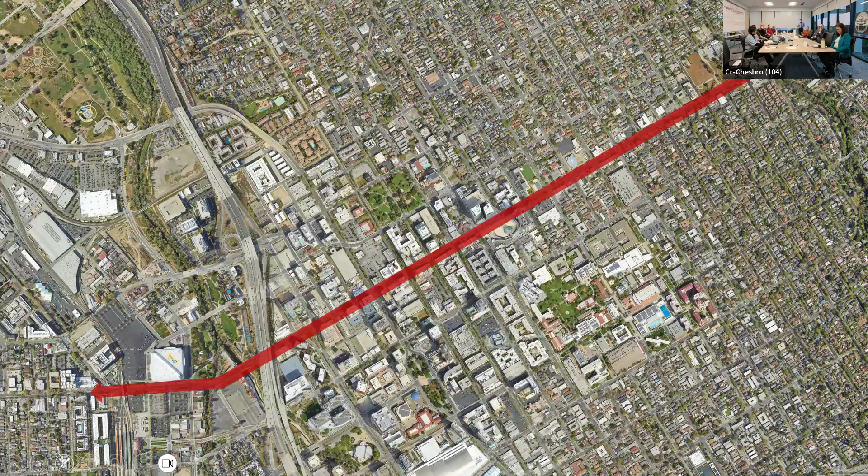So when looking at this corridor, in conjunction with our work on the downtown transportation plan, we wanted to not just look at the specific street itself, but really think how it interacts with the larger downtown and integrates with the urban fabric downtown.

This effort is looking at this stretch of Santa Clara Street, as well as thinking about those blocks to the north-south. How do those interact with the street? Are there uses happening on the street today that could make more sense to move onto those side streets? Thinking about parking, for instance—in some places restaurants might want outdoor dining, so can we move some of that parking and loading to the side streets, just as an example?

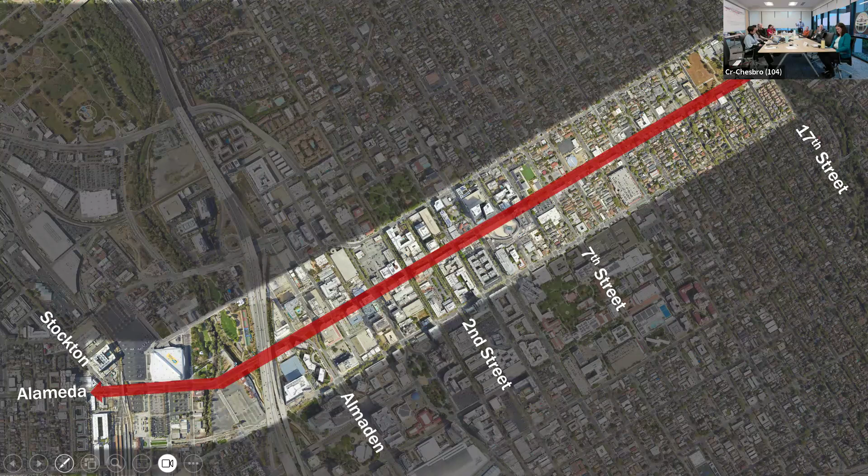For context, we have Stockton to 17th. We have 7th Street here in the center, which leads us to San Jose State and City Hall. 2nd Street in the middle, right around our light rail core, Almaden, Big Heavy Street, and the SAP Center and Diridon on the left.

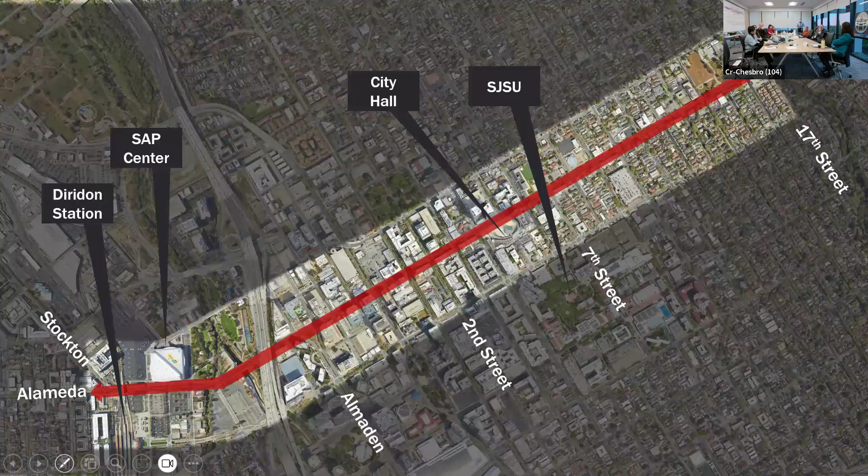In thinking about this, we realized this needed to be more than just a transportation project. We needed to think about what the street is doing. Since the street is really our largest public space in the city of San Jose, how can we maximize the utility of that public space for people in San Jose, for businesses, residents, and visitors—thinking of it as something more than just a way to get through downtown San Jose, but a reason to come to downtown San Jose.

Through an RFP process, we met with a large number of firms and had a lot of really good discussions, but we ended up deciding to go with SiteLab. They're located in San Francisco, so they're very familiar with the Bay Area context in San Jose as well.

I think they really got our idea around a very multidisciplinary approach—not just focusing on street signals or potential changes to pavement, but how do we activate this space and make it into a public square for San Jose.

For folks on the call and in the room, you may have seen this name before. SiteLab has done great work on 28th Street Station and some other work for Downtown West as well. They're very familiar with this corridor, and we think they're a great fit for the city moving forward.

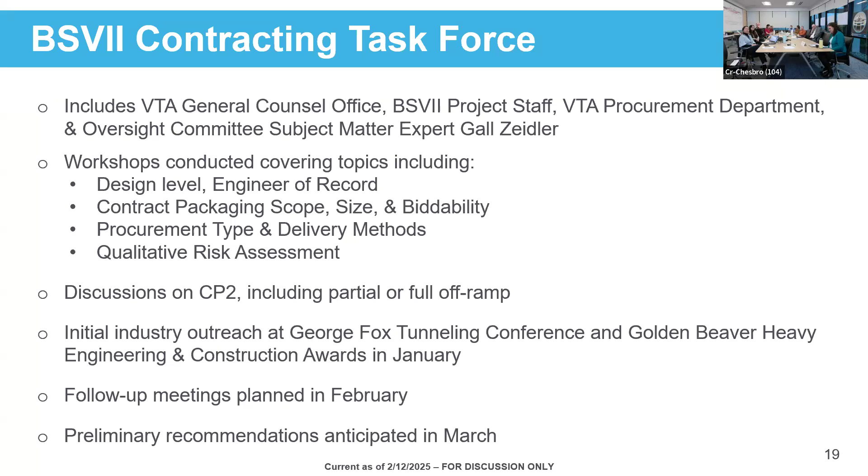That is within the NEPA guardrails, so it does not require any additional environmental clearance. That was confirmed at the workshop we had in December.

In addition, the West Portal launch structure construction was awarded at the December board meeting and is getting ready to gear up, which means the large shaft where the tunnel will start from will begin construction. That will also kick off extended work hours and weekend work.

The area in dashed green at the bottom shows our FTA milestones. Our federal lobbyists came and gave an update at the VTA board meeting last Thursday.

Based on their guidance, since they're closely tied into what's happening in Washington, we're evaluating the time frame for submittal of our FFGA, the full funding grant agreement documents. That section may shift over to the right, and we're working through and evaluating that now.

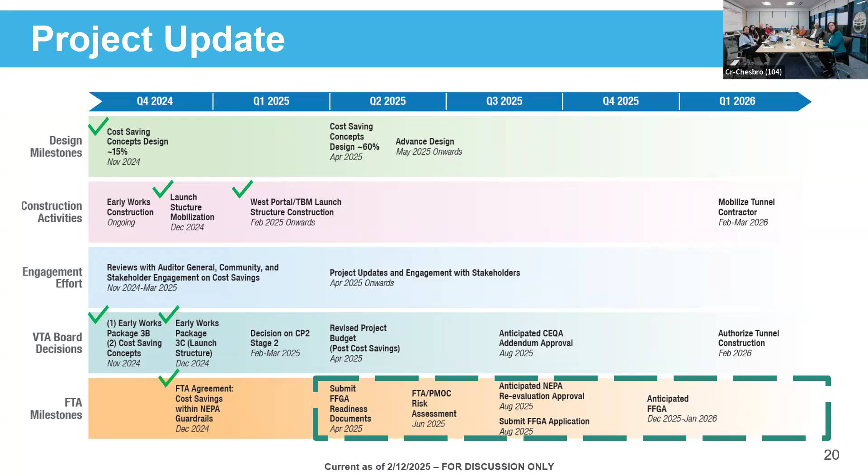Any questions on that before I get into the cost savings?

We haven't hired a consultant or subcontractor that hasn't gone over budget. It just happens. You were saying how these several tunneling companies see if they can work within our budget. What kind of contingencies do we have, because they always lowball, and then three-quarters of the way through, it's 'we can't make it without more money.' And of course they're three-quarters of the way through. What are you going to do?

There is contingency built into our budget, and risks that are also contemplated as costs within our budget to account for that.

Diving into the cost savings, you've all seen this table before. The top four items are the Level 1 items we've discussed previously: changes to criteria requirements, refinements to stations that don't affect the passenger experience, converting the parking garage at the 28th Street station into surface parking, and using owner-provided materials.

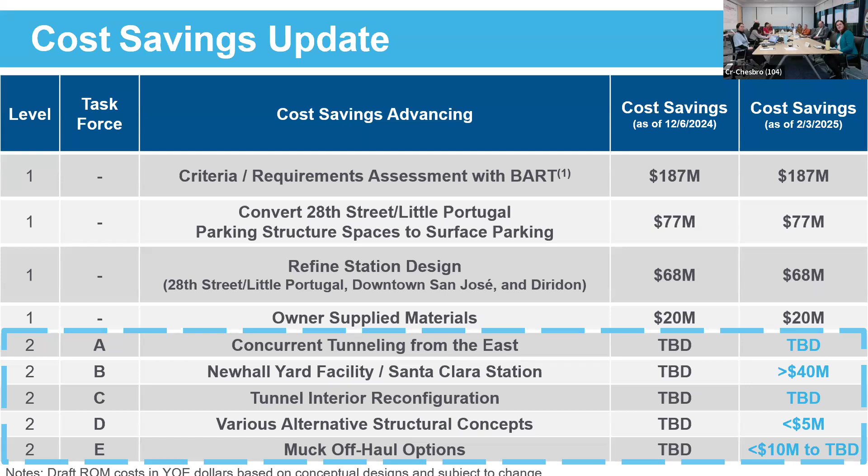For those cost savings, we've advanced enough to have rough order of magnitude cost estimates. There were some areas that needed further study, which are now considered Level 2, so we've pulled together task forces for each of those groups. I'll walk through the status of those five groups on the next coming slides.

As I walk through them, similar to Level 1, there's a criteria evaluation here: what the cost savings is, whether it will require additional federal or state environmental analysis, whether there would be a change to forecasted ridership, whether additional right-of-way would be needed, whether coordination and engagement with BART and other third parties is needed, and whether there's a need to coordinate closely with the community.

The first is Task Force A, concurrent tunneling from the east. This task force focused on a smaller single bore tunnel based on space proofing. It was determined that a 45-foot diameter smaller tunnel boring machine could be launched from the east portal, while we would still have the 53-foot diameter tunnel boring machine launched from the west portal, evaluating whether they meet up at 13th Street or somewhere around that location.

Through this study, with the change to a smaller tunnel boring machine, we were able to make the depth of the alignment at the stations a little bit shallower. With the smaller tunnel, this station would require cut and cover construction, with platforms on the sides of 28th Street. There would be no changes to the passenger experience at the surface level, but below ground, instead of a center boarding platform, there would be side boarding platforms. There would be some increased truck traffic due to this, as well as some additional environmentally cleared right-of-way that we didn't think was needed that would now need to be acquired.

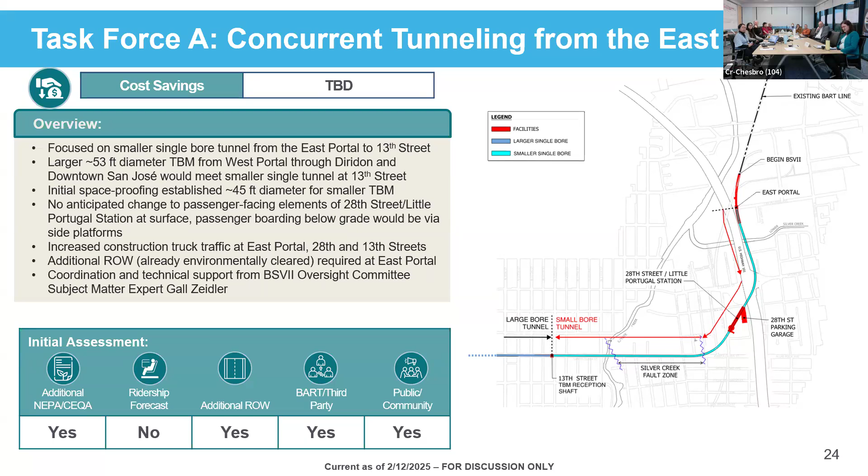In this task force, we're coordinating with Gall Zeidler, our subject matter expert, evaluating whether this is something that could move forward. Right now we're looking at the cost savings and schedule savings from doing the concurrent tunneling. A decision has not yet been made, but I wanted to show this next slide so you can see it a little bit better.

That's just because tunneling is incredibly expensive. That's where the savings comes, as opposed to cut and cover.

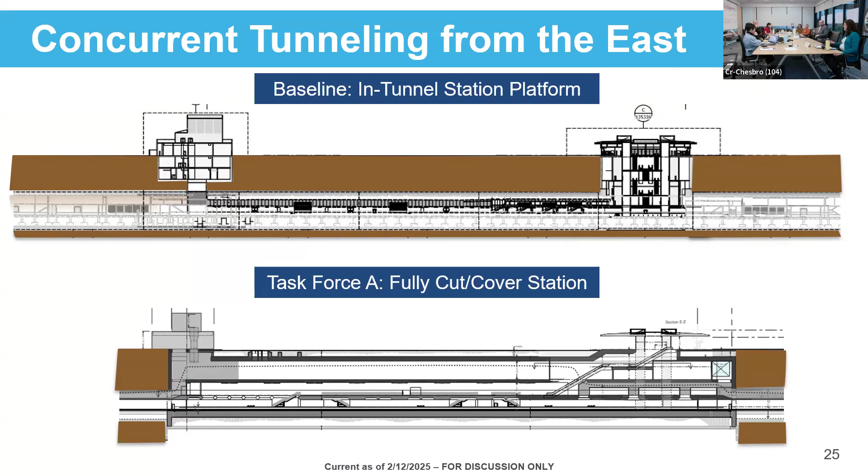It is, right? So if you have 2 tunnel boring machines, initially there would be some upfront cost from having to buy a second tunnel boring machine, but depending on what the schedule savings would be, schedule savings is time savings, which also converts to cost savings. So that's what's being evaluated. Does that answer your question?

All right, the next task force B is looking at the yard and the Santa Clara station. We talked about this as early as level 1, but it needed further refinements, so it moved into level 2. We coordinated closely with BART and landed on this layout, which provides more efficient vehicle storage and maximizes the efficiency of the maintenance areas.

We're looking at evaluating the trade-offs between the capital costs and operations and maintenance costs. This layout we came up with BART provides around $40 million in savings, but still includes the parking garage at the north end there.

So we wanted to continue looking with BART and address some of their comments and see if we could find additional savings. As you can see here, this is option E. So we've gone through several iterations already.

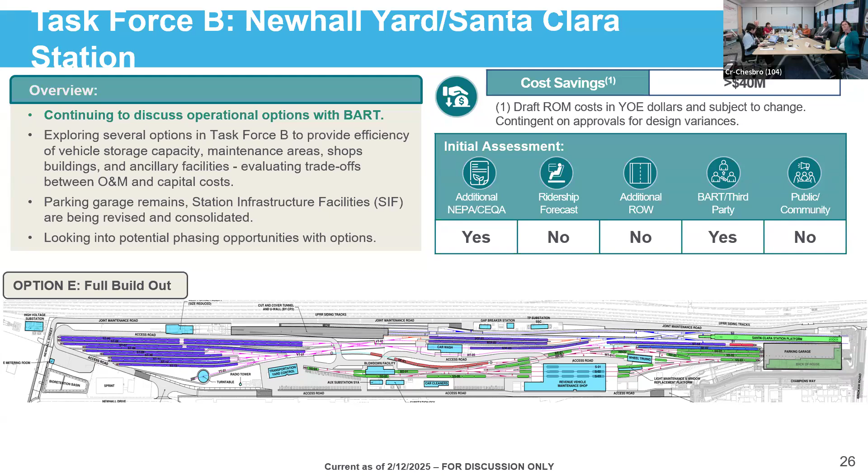We then looked at option F, where we were able to remove the parking garage and include surface parking. That is something we worked through with BART, and as you can see, that provides much more cost savings, over 100 million in cost savings.

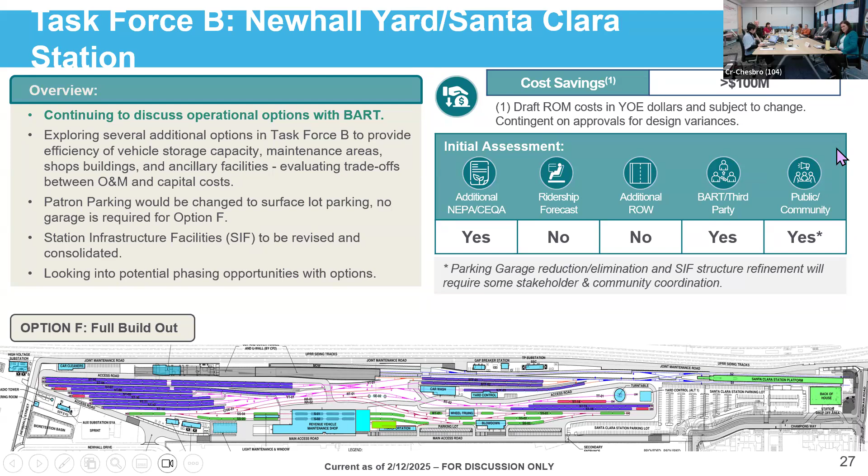Still, there were some comments, and so we're now on to option H. That's shown as draft, very hot off the press, keeping y'all updated. We haven't worked through this entirely with BART yet, but it's in progress, and that's why the cost savings is TBD as well. As we learn more, we will report back.

And for all of these options, we're looking at potential phasing opportunities in conversations with BART related to that.

Knowing that the most public facing piece of all of this is the parking garage, I wanted to show a zoom in here of the parking garage layout on top that we currently have, and a potential draft layout of surface parking on the bottom. If we move forward with these options, we'll have more engagement on moving forward - just wanted to give you a better glimpse of that on the screen.

I see. So you're just leaving the space, paving it for parking, with the idea that sometime in the future, after operations get going, you will then, as money comes available, change it into a more quote-unquote full-blown maintenance yard.

Well, this area - this effort is to space proof, to see what can fit in there. Initially the phasing we were talking about was potentially just some sort of storage tracks or very minimal things, and then get to this full build out that we're showing on the screen.

So the area for parking would remain, but if we have parking that's not over a garage, then there's potential there could be some sort of development over there.

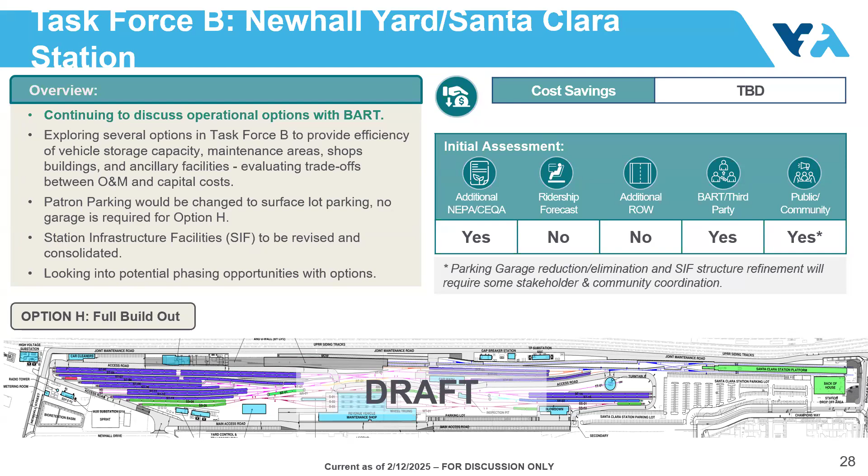Jonathan, I see you have your hand up. Do you have a question about this? Yeah, are there any additional details, or were there any other changes or refinements to the station itself, or is this just reconfiguring the yard part?

Just reconfiguring the yard part and the station infrastructure facilities. If you look on this one, you can see a little bit. So there's no changes to the station. If the parking garage goes away, then the station infrastructure facilities that were fronting Champions Way on the ground floor will be transitioned into what you can see as kind of a rectangular box shown there for those facilities moving forward. So we'll have a lot more engagement and discussion if this moves forward, but this wanted to keep you updated on what's being explored - no changes to the station or the platform.

So do we have any updates or pictures of what the station itself looks like at this point? I know all the refinements are being looked at. Is this all the way back to the last thing that came out of the DRC, or will we be seeing an update on what this all looks like at some point?

So the station has not changed at all from the last images that you saw. Which set? I know there were some refinements, but I don't know if anything got solidified. I know there was the DRC and then some shrinking of things. I'm not clear what the leading candidate is at this point, so it might help to get some clarity about that.

Yes, so we had the design review committee meetings, and then we reduced the size of the station entrance building slightly and made some modifications, and brought that back to the group here and discussed with you. That's the latest that we have. The stations have kind of gone on hold since that point, and we've been exploring these other task force areas. So the only thing modified related to the station thus far is the parking lot in that back of house building, but this is very high level concept at this point. We would have future additional engagement, but not anticipating it in the imminent future.

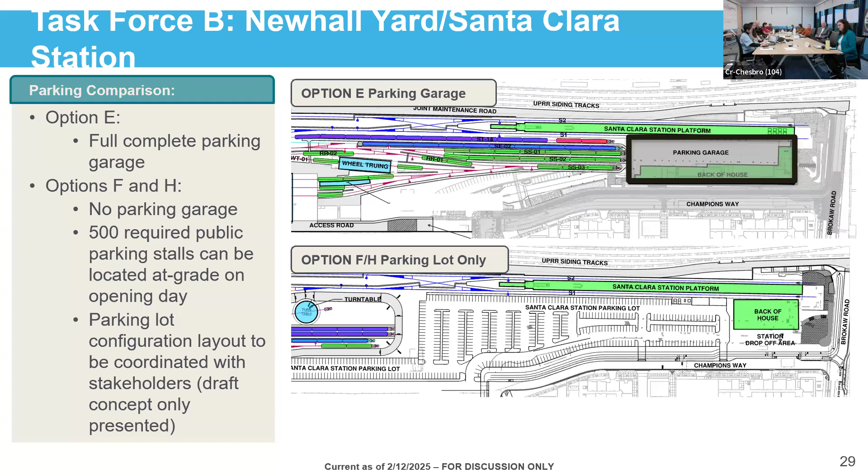Task Force C is looking at the interior of the tunnel, looking at the bottom, having structural fill on the bottom with the emergency ventilation in an overhead plenum on the top above. This is being evaluated. It's technically feasible. We're working through comments and questions with BART and reviewing the schedule to see if we'll come up with savings. We'll have more information on cost savings in the future. This is the current status of this task force.

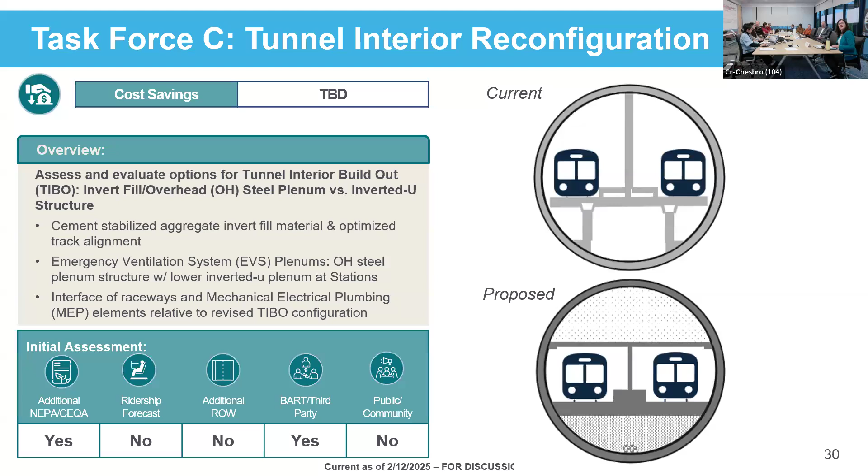Task Force D is looking at various alternative structural concepts, changing and optimizing the support of excavation rebar within temporary and permanent walls, and different structural elements. This resulted in savings of a little less than 5 million. This was something we had started in level 1 but weren't able to wrap up entirely, and now we've been able to advance that further.

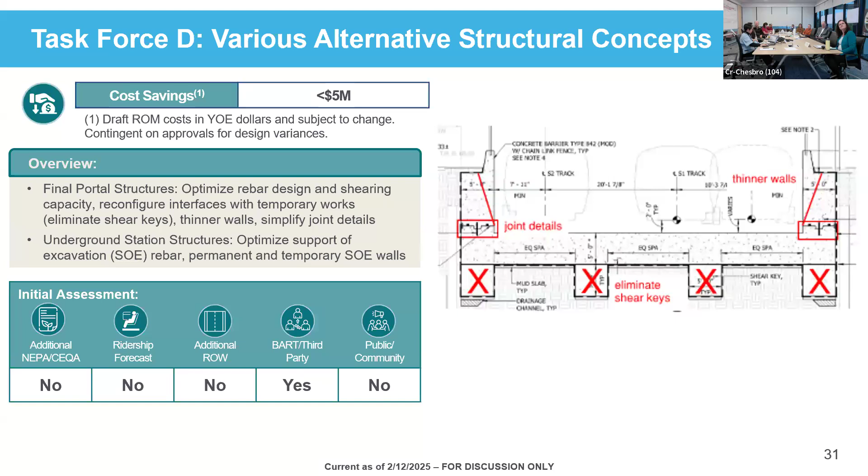The last task force, E, is for the muck off-haul. This includes hauling to local disposal sites to reduce trucking costs. With this change, we're able to save a little under $10 million. In our original estimate, we assumed we would have to truck to places near and far for disposal, but based on more research, we've determined there are enough close local places that we don't have to take those longer trips.

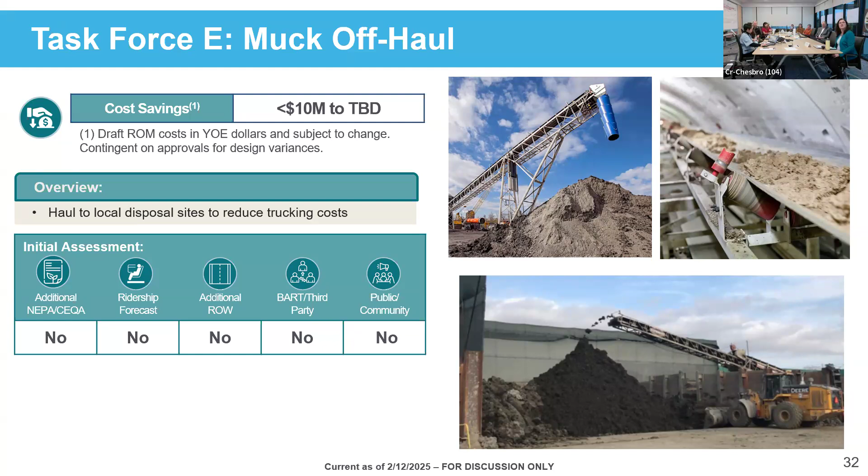We've also talked recently about the salt ponds project and various other options, and those will be studied as part of the next level. This report here is just on the disposal sites, and that's all I have for cost savings. Any other questions before I turn it over to Brent?

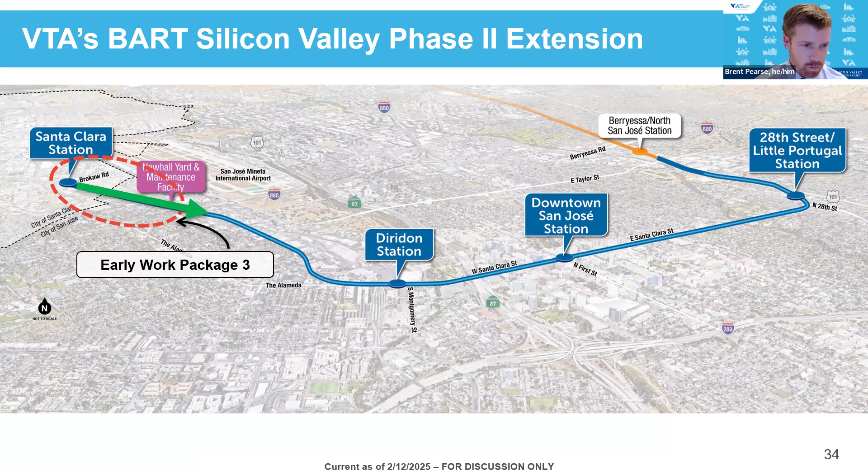Just to reorient everyone, you've seen this slide a couple of times, but our contractor has been doing some of the early works out there, mainly utilities, fencing, some drainage and site preparation. The colored squares, the purple and the pink or brown, are things that will come later, supporting the tunnel, either the tunnel factory, the place where we'll store muck, or the concrete factory. I'll call out some of those locations when we do the drone flyover.

What's most important is what's upcoming, the item in the top left at the southern end of the yard. That is where we have just given our notice to proceed to our contractor to start work on the launch structure for the tunnel boring machine. This is a large excavation, a large pit where we'll put the boring machine into, and it includes a ramp. It's about two years worth of work to build this structure, and it's going to be kicking off in May.

With that come two other important things for communities around the station. Before we go on, we'll be beginning some night work activities starting in May, and also some shifts starting on Sundays as well. I'll talk a little bit more later about how we're going to be notifying and bringing you all up to speed, but just so you have a picture of what's going on out here, this is where most of the activity is going to be starting up this spring.

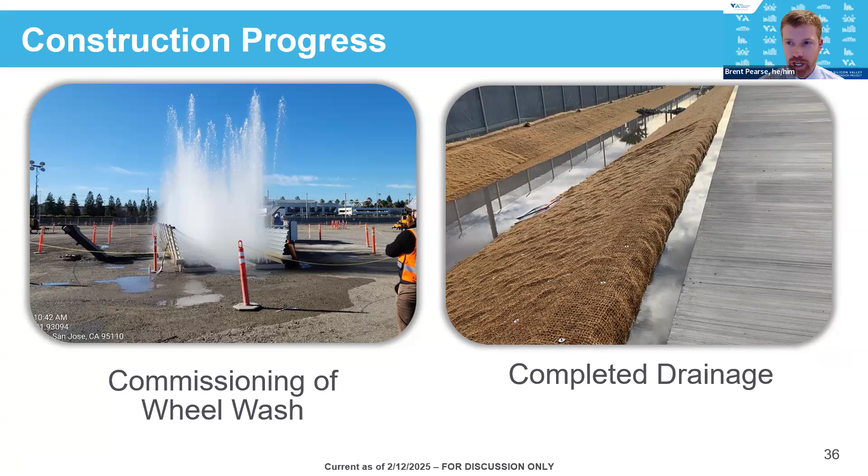All right, so we're going to do a flyover here, but before we do, I just want to orient you. You're looking south right now. You can see the downtown San Jose skyline there in the distance. On the left we have Coleman High Line, and on the right we have Caltrain and the Santa Clara Historic Depot. So we're right above Brokaw right now, looking south down one of the new roads that's been constructed. So let's hit play.

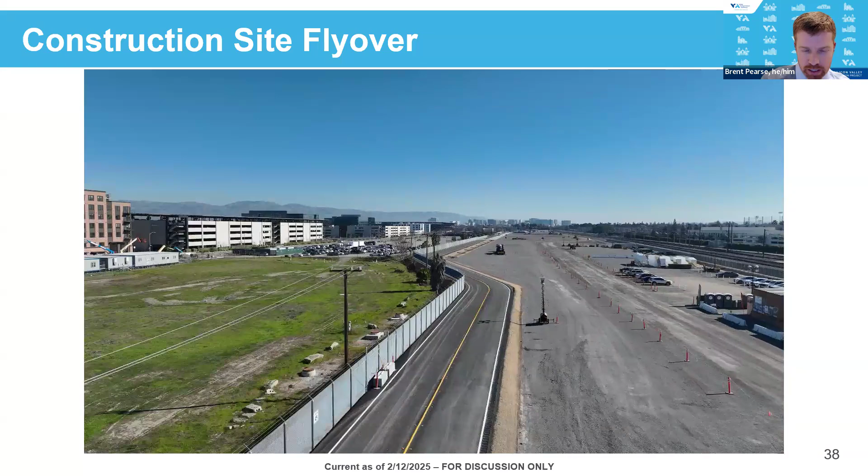So you can see new drainage there on the right and on the left, right next to the road. This is where we have one pod of offices for our contractor. They're going to be bringing in some additional trailers for staff as the contractor ramps up for the launch structure construction. Kind of in the middle of the site here on the right is where some of those facilities are going to eventually be constructed for the tunnel lining factory, processing the concrete, and storing the muck as it comes out of the TBM shaft.

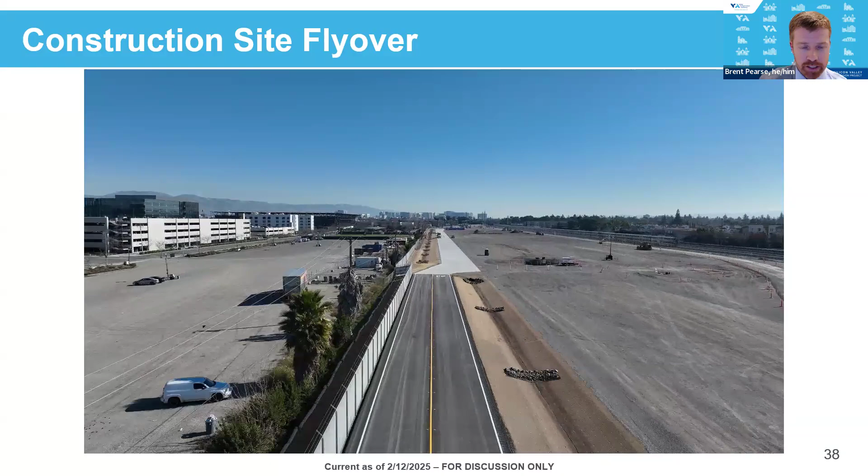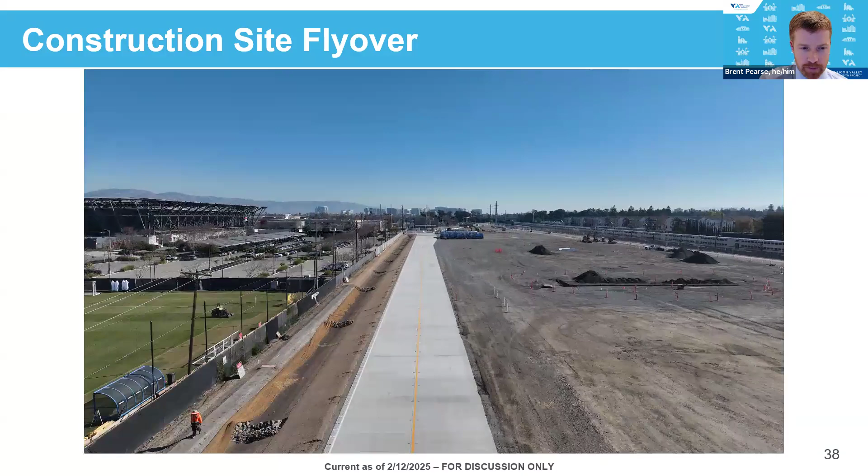So here's that new drainage ditch that we were sharing with you. We've been monitoring this very closely. It's been working well with the recent stormwater events that we've been having on site. Also been working on some fencing with our partners, getting that fencing up.

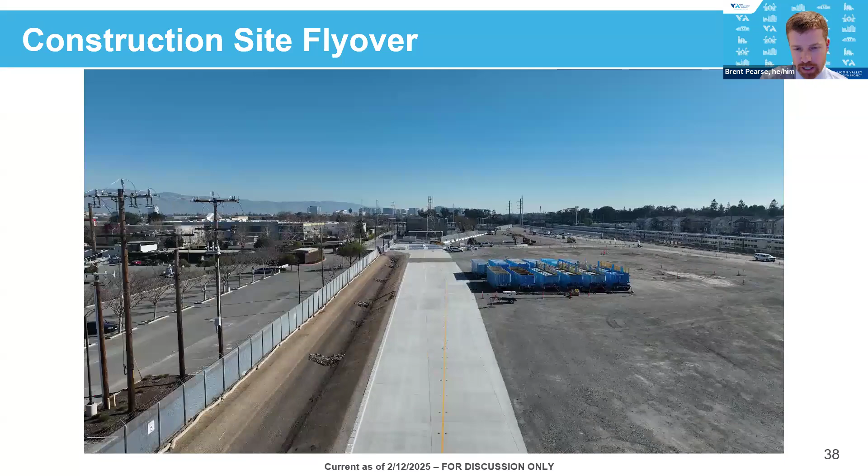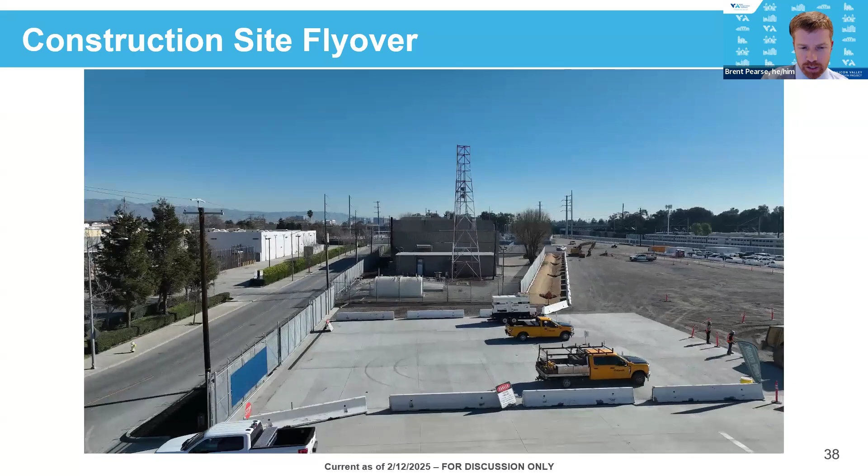And you can see here some of our filter tanks. This helps filter sediment off the site, or that's discharged. And this is the entrance that has been upgraded as well, so this is our entrance to Newhall Yard. We've been doing some utility connections here with the city as well, water, drainage, and there'll be some PG&E work further south on the site as well.

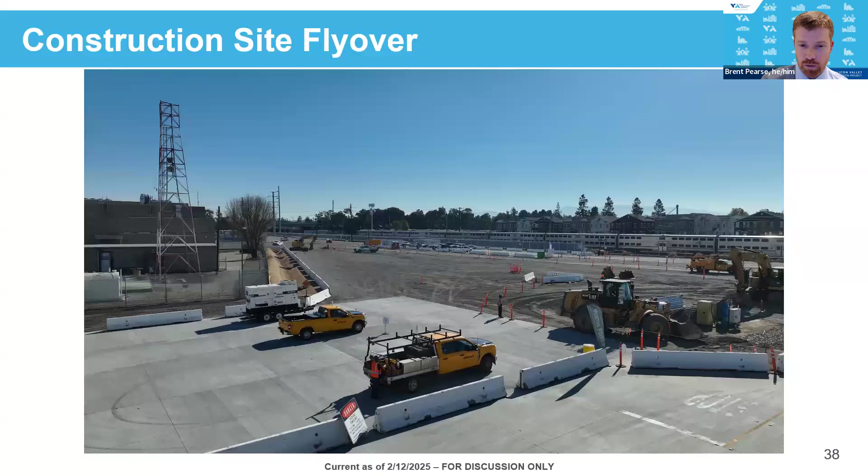So progress is being made, and we hope to have one of these kind of flyovers every quarter for you all. And then in the coming weeks, our contractor is also going to be working to install some time-lapse cameras that will be focused on the launch structure itself. That'll be a really fun way to start to see rapid progress, and we'll do some video for you all in the future on that as well.

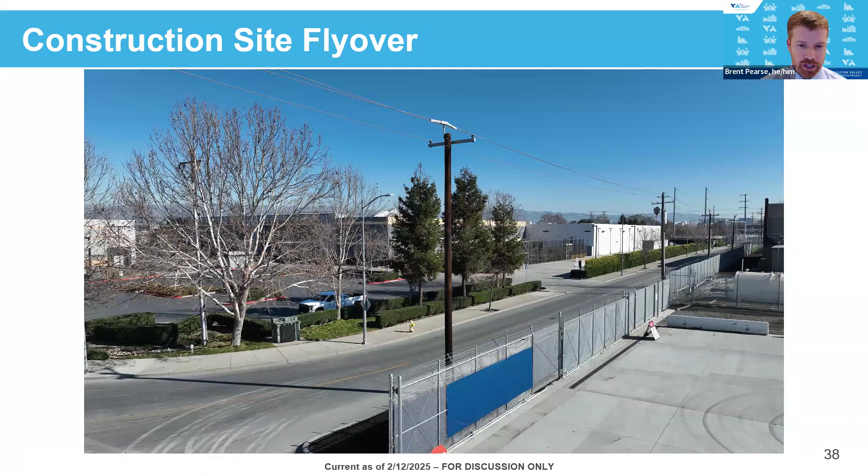So I talked a little bit about this mobilization. Some of the early work for the TBM shaft will begin in March, but we expect the night work to begin in May. So in terms of notifying all of you as partners and neighbors, our team right now is putting together a communications plan. We are going to be doing a mailer to the surrounding community, so residents and neighbors will probably be receiving something a couple of weeks before the night work begins, letting them know, giving them a heads up of what to expect, and who to call if they have any questions.

Those questions will come to team members in the room here, so you know us as well, and you all can always reach out to us directly. You have Ollie in the room, who is our new station lead, and we'll have other folks available to answer questions as well. We're also going to be working on a noise curtain for the residents on the west side.

So those are our three HOA communities — excuse me, two HOA communities, and one is the university community. There'll be a temporary noise curtain that will be installed along the structure, between the structure and the railroad tracks, and that will help with some of the noise as well.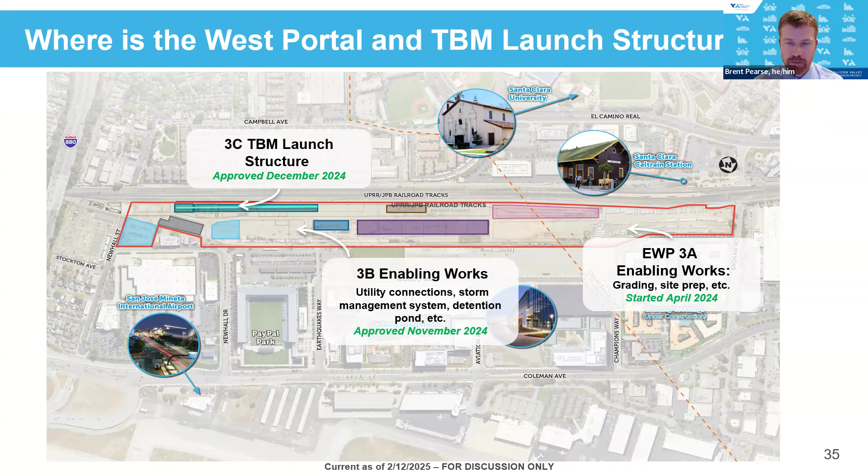All right, just want to briefly jump to folks online who might have questions or thoughts on this section. Thank you.

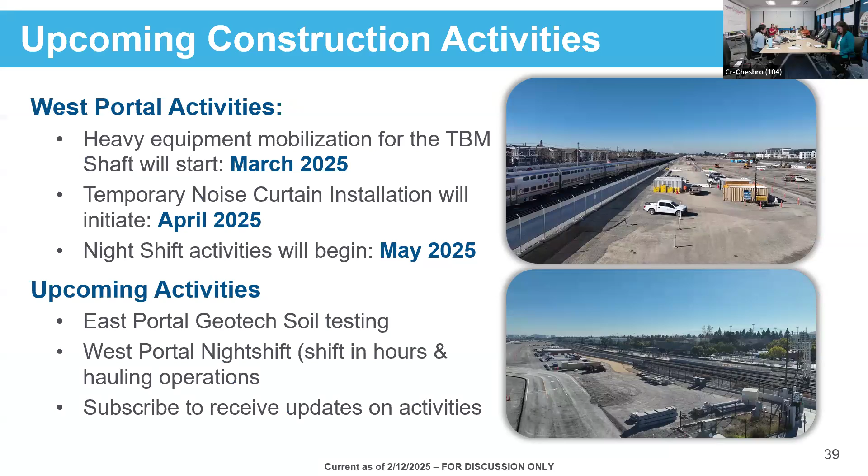I have a question on page 37. On the right image, there's an annotation on the lower left-hand side. It says Altura Commons. What is the reference to that? That's in my neighborhood.

Very observant. I think that's just a geotag from our inspector's camera, probably picked up the project name there and its location. You can see the coordinates there, but this is not taken from the private property — it's probably on the same longitude as the Altura Commons, as the picture was taken on the site. Okay.

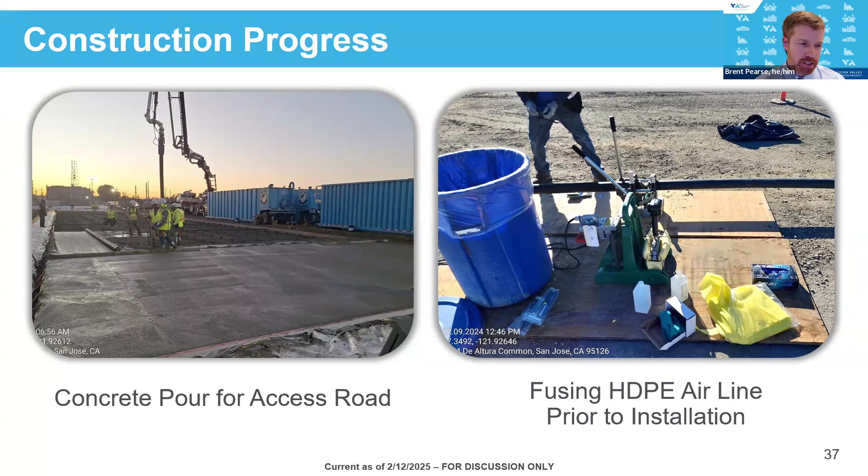Any other questions, Sean? All right, let's move on to Thriving Business Program updates.

This is our last agenda item for you. We're here tonight to update you all on our Thriving Business Program. It's been a while since we've brought this program to the CWGs. It was previously called our Business Resource Program. We've had a couple of meetings over the last year with our Small Business Task Force, and some of the feedback had to do with the name, making it more active and more representative of what the program will do for businesses during construction. So we've changed the name to Thriving Business Program, representing support for businesses and helping them become more resilient during construction.

Some additional quick history: this program has been developed over a couple years now. We've done a lot of industry research, talked to other agencies that have implemented business programs. It's also built on lessons learned from our own agency, either from BART Phase 1, from building bus rapid transit in the downtown core, even thinking about light rail construction or other projects we've done in urbanized areas of the agency. So we really put together what we think is a supportive and positive program for our businesses moving forward.

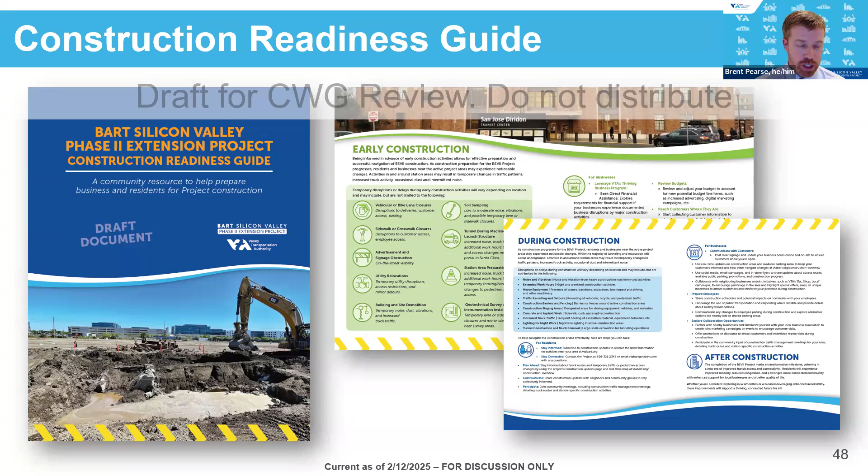In terms of priority, we'd really love feedback on the surveys first if you have limited time, and then on the guides second. Our intention after we get feedback is to have a pencils-down moment and get these translated into multiple languages and out into the hands of our small businesses and community-based organizations.

Tiffany is our lead on this from our team, so if you have feedback please feel free to email her directly. If you need an extra week beyond the 24th - we've already gotten some feedback that maybe a third week would be helpful - we can take an extra week of comments as well.

So any questions on the Thriving Business Program from anyone? I'll start with folks in person. Sean? John? Folks online? Anna?

Thanks for clarifying that it's 500 feet from the corridor, which narrows it down to specific businesses. My question is, have you already identified directly who those businesses are in that area, and will you be contacting them directly to let them know you're there for them, or will the process be that they seek you out for more information? I'm just curious how that's going to go.

Great question. Some of the feedback we got from our board was to have a little bit of flexibility in what that 500-foot barrier is. You'll see we have a map in the program guide - it's meant to be a visual tool to show the approximate location of a business that could receive marketing or local resource network assistance.